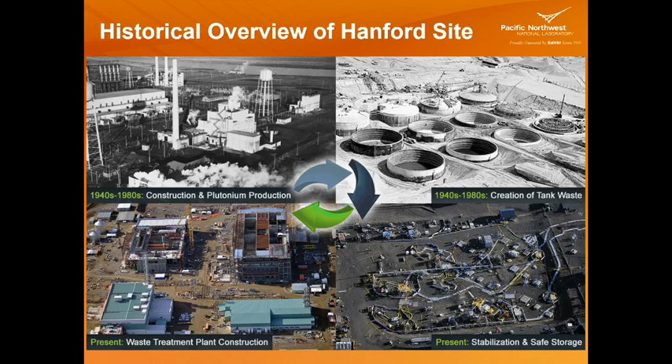The process started with uranium billets that were fabricated into nuclear fuel rods in the 300 area and transported via rail to the 100 area, where they were inserted into one of multiple process tubes in the 30-foot high reactor core. With water from the Columbia River rushing into the reactor, a nuclear chain reaction transformed uranium into plutonium.

It's hard for people to imagine the enormous energy that's produced in a reactor, but as I remember, the flow at that time was like 186,000 gallons a minute. And that water is entering the front face ice cold, and it's exiting the rear face at nearly boiling temperatures in that short distance of time. And there's 2,004 process tubes going through there, so it's hard to imagine the energy that is contained unless you hear.

So every time I mouse over this, it's going to act funny because I can't control it otherwise.

But talking about the energy, this nuclear reaction is producing a tremendous amount of energy. When they pull water out of the river at pretty cold conditions, I don't know if he thought it was ice cold. I don't think it was ice cold coming out of the river. But 50 degrees, it was pretty cold water. Running over that, it makes it boil. So there's an awful lot of energy being produced by this reactor.

We'll show you some more of the reactor as we go along, but this is what the nuclear reactor looked like back then. It's just a massive amount of energy that you experience. But a startup like that is phenomenal.

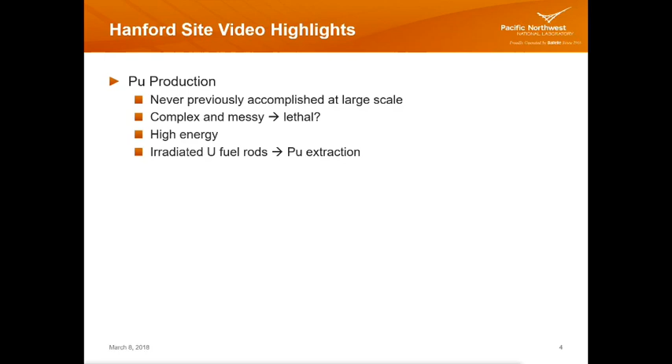Millions of gallons of highly radioactive liquid waste, a byproduct of this chemical separation process, were stored in roughly 60 underground tanks, ranging from 500,000 to 1 million gallons in capacity. Ultimately, the Manhattan Project was a success, and the long-kept secret was out. The plutonium produced at Hanford was used in the Fat Man bomb, dropped on Nagasaki on August 9, 1945, forcing Japan's surrender and bringing an end to the war.

Ushering in the atomic age, Hanford continued to support America's peace-through-strength policies throughout the Cold War, producing enough plutonium to maintain a continual and formidable deterrent for any potentially hostile nation, namely the Soviet Union. However, during these critical wartime and national security missions, the thought of what to do with the resulting waste and what its impact on the environment might be was secondary to the need for immediate production and use of the vital plutonium. Nearly 200 million gallons of this waste was held in underground storage tanks, or worse, returned directly to the ground.

There were two big headers on each side of the reactor, and the effluent was then distributed out to a cooling basin. 25 million cubic feet of buried or stored solid waste. 2,300 tons of spent nuclear fuel.

20 tons of plutonium-bearing materials, and 53 million gallons of waste in 177 underground storage tanks. This waste is the legacy of more than 5 decades of plutonium production, making it easy to see how Hanford became the largest, most complex environmental cleanup effort in the world.

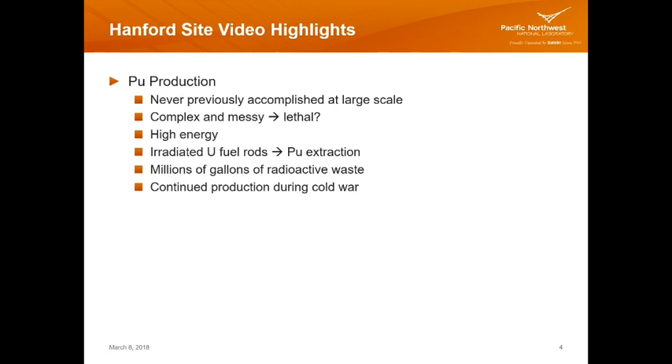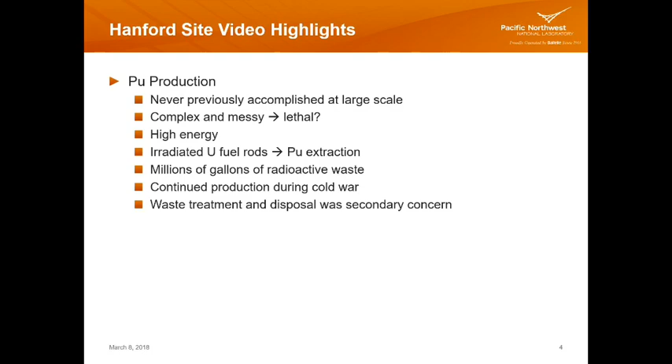So you can sort of see how the problem got to be so big with all that waste. So the video in the end was telling you how big the problem is. There's 149 tanks that were built, and since then we built a number more to store all the waste. Those were million-gallon waste tanks. All right. So again, the issue was not what are we going to do with the waste. The issue was making plutonium and trying to win the war.

Okay. So here's the Hanford site. It's 586 square miles in eastern Washington. That's half the size of Rhode Island. Okay, it's a big area that the government commandeered from the few people who were living there. About 1,000 people lived there in the first half of the 20th century.

And the government identified this as a primo spot because it had power. Grand Coulee Dam had been built in the 30s, not too far away, so lots of power. Largest river west of the Mississippi is here, so lots of water. Maybe, if you consider the Missouri River part of the Mississippi River system. And pretty remote, okay? So it was a very ideal place.

In the heyday of 1944, up to 55,000 people came to work there. Just signed up, heard there was work, and came from all over the country to work at Hanford to build. They didn't even know what they were working on. They just had a job. Whatever your trade was, you did your job. You didn't know what it was for. Nobody knew what it was for. Okay, they knew what they were doing in their little job, their little purpose. But they didn't know the big picture.

Couldn't tell anybody what we were doing. Yeah, we're trying to build a bomb to win the war. That was not the point. You know, it's not like the media we have today, where everything gets out left and right. Leaks are all over the place. Leaking was not approved then.

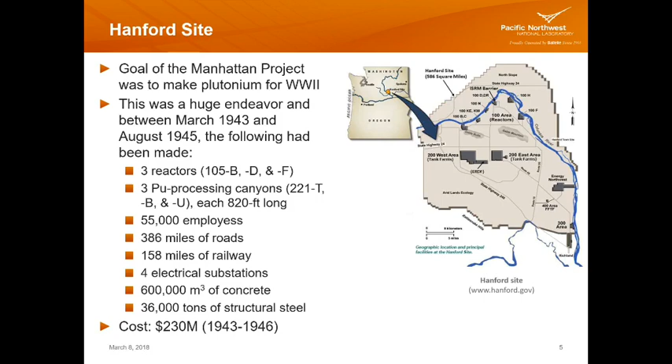So the ongoing process, as they said in the video, once we built the bombs, how many bombs were set off during World War II? 2. 3, 1 testing. I heard 2, dropped on Japan. How many bombs total went off? 3. The other one was Trinity, the one that was set off in New Mexico as a test right before that, just to see if we could do it. But we had 2 different kinds of bombs.

One was built at Oak Ridge, Tennessee. They were doing the same thing, only different. At Hanford, we're trying to get plutonium and using plutonium to build a nuclear bomb. At Oak Ridge, they were using uranium. They're building a uranium bomb, enriching the uranium. So we had 2 different bombs to try to make sure at least one of them would work, right?

We were able to test one of them. And that's all we had. But after we dropped the second one on Japan, they figured, well, it's going to happen again. Once it happened again, that's when they surrendered. We didn't have another one. That's all we had. So we were able to save a lot of lives by finishing the war.

So here's how bad it is, all right? So I said there's 149 single shell tanks. Those 1 million gallon tanks, 75 feet in diameter, 30 to 40 to 50 feet deep, storing this liquid waste. Well, over the years, again, we're not focused on long-term storage. We're just focused on the immediate situation. They weren't really designed to last very long, 15, 20 years, maybe. So what happens after it exceeds their design life? They still got this waste in it. What happens? They start leaking.

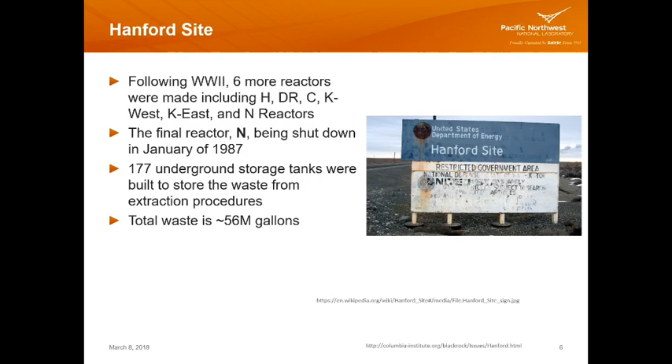So they built how many more? If there's 149 built originally, now we have 177. That's simple math, right? So 28 more tanks were built, but these were double shell tanks. These were meant to be long-term storage. And so they were able to pump a lot of that waste into there.

Okay, so how do you make plutonium? No, this is all free and clear stuff. Nobody needs to think that they're going to have to sacrifice their life for the knowledge that's coming out right now. All right, how do you make plutonium?

Well, you take some uranium-238, which is the common form of uranium you find, and bombard it with neutrons. Some neutrons impact the uranium and create uranium-239. Uranium-239 has a half-life of 23.5 minutes, so it doesn't last long. It lets off a beta particle and becomes neptunium. Neptunium has a half-life of about 2 days, and it decays to plutonium-239.

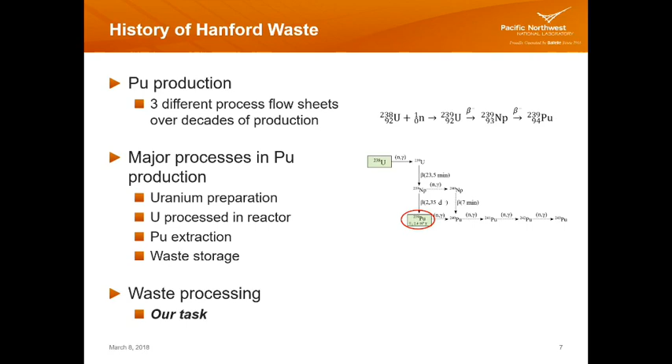So what they have is these fuel rods. These are tooled and shaped uranium rods, and that's what's inserted into the reactor. That's what's bombarded with neutrons, and that's what creates a lot of energy.

You've got to keep it cool with river water. The river water is not being contaminated—we're not putting contaminated radioactive water back in the river. It's just used to cool the plant.

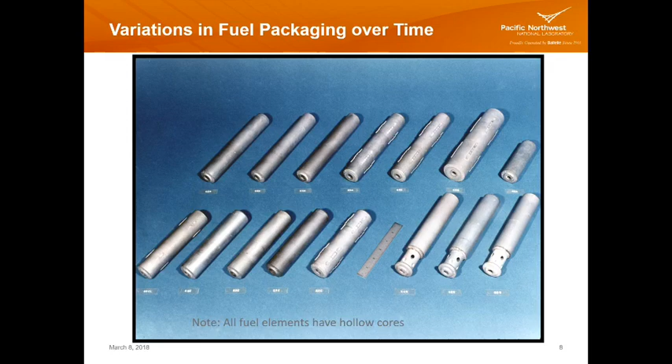Over the course of World War II, they ended up building 3 reactors. The B reactor was the main one where we got the plutonium used for the bombs. N reactor was the last one built, in January 1960, and was actually a dual-purpose reactor—still making weapons grade material but also generating power. All the other ones were just weapons reactors.

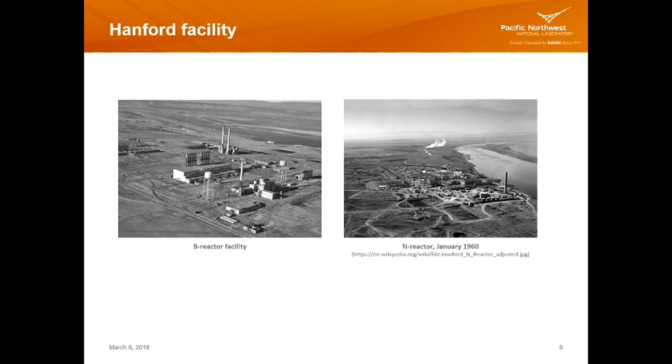They've all been decommissioned at this point, demolished and stabilized, except for B reactor, which is a National Historical Site. This is what it looks like now. You can still go out on tours and sign up for one. The National Park Service runs that with local people involved.

There are still people working here who were little kids at the time—some actually lived at Hanford and were displaced, told by the government, 'you've got about 30 days to take everything you want and get out, because we're taking your home and your land, and we're not telling you why. But just remember, we're fighting a war, okay?' So that has a part to do with it.

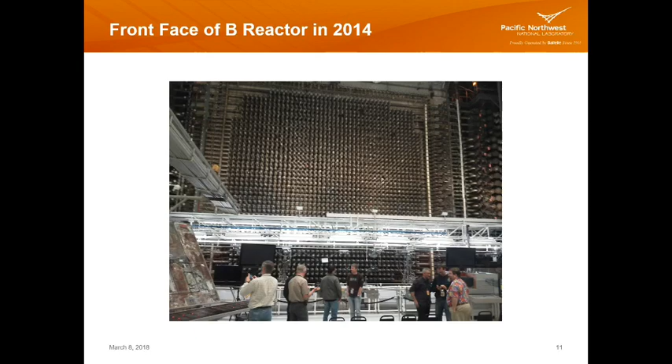So this is the B reactor, and here's the chemistry, okay? I'm not going to go into great detail on the chemistry, because I'm not a chemist—I'm a mechanical engineer, so I don't really like chemistry. But when you're working with this stuff, you work with people who like it and know how to do it.

So anyway, the plutonium extraction from uranium uses some pretty bad stuff to try to pull out the plutonium. As I said, it creates an awful lot of waste, both in the leftover uranium and in the byproducts that come out. In fact, it's not just chemical waste.

When you're trying to bombard the uranium to make the plutonium, there are a lot of other byproducts and decay products that come out of this. So it's a very complex mixture of chemical and hazardous nuclear waste. Cesium and strontium are the main byproducts of this process.

Cameron asked: is uranium hazardous as is? It's radioactive, so with enough handling of uranium you will be exposed to radioactivity. But I've got some—I showed you guys last time, I've got a little piece of uranium in my office. It's not at dangerous levels, but given the concentration, you don't want to be handling these without some tools. Isn't that alpha radiation?

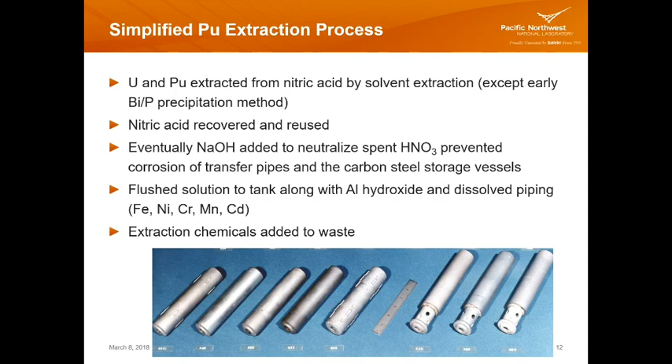Here's the slide I talked about, the B reactor that was built in 1944. A couple more were built during the war, D and F, to produce more. We didn't end up needing them in a timely fashion, but we kept producing this stuff because now World War II ends.

This is all recent history, all in the last 100 years. World War II ends, and now the Soviet Union is our enemy. They were on our side fighting the Nazis during World War II, and now they're on the other side, and they are developing these weapons too. They are building bombs and testing them. Now there's a threat that we would have a nuclear war, that these bombs would keep going off, that we would fight each other with nuclear weapons.

The impacts of what happened to Hiroshima and Nagasaki would become a routine thing in war. War is bad enough, people fighting and killing each other, dropping bombs, destroying facilities, but to be using nuclear weapons as a matter of course is worse.

When you hear about that today, you hear about the threat that North Korea has, that they have nuclear bombs that they would be willing to use on another country. Now we say that we're not going to go willy-nilly dropping nuclear weapons on something, but that was always the threat with the Soviet Union.

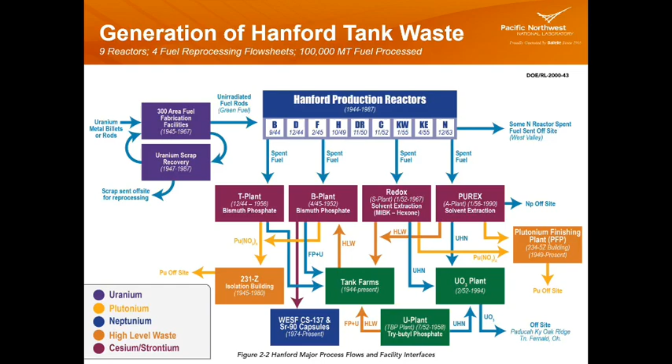In fact, since 1983, they've had a cleanup operation going for vitrification, which is what we're going to talk about in a minute here at Hanford. But they've been doing it for a long time. The Savannah River wastes are a compositional subset, just a small subset of the vast array of chemical witch's brew at Hanford. It's a small and relatively easy cleanup job at Savannah River, even though it's been going since the 80s. There's still a lot of stuff to clean up, but it's a fairly consistent waste stream to deal with, so it's not nearly as complex.

So this gives you an idea of the complexity of the problem, of the reprocessing that was done, of the variety of methods used to try to get the plutonium out. It created a lot of waste, and so in the late 80s, we start to realize we have a problem here.

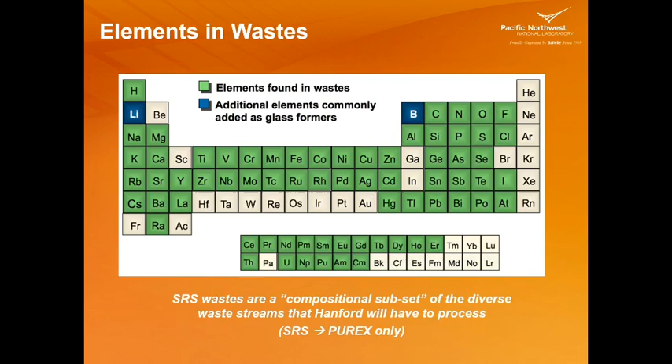Cameron asks: if the waste is all these different elements, wouldn't the waste react with itself? There's various kinds of reactions, and we'll look at some of those. I'm just still trying to get an idea of what exactly this waste is and why it is waste.

I've got some pictures of it. Here's a cartoon of an underground storage tank, like the tank farms you saw in the video before they got covered up. They built them in a big depression and covered them with soil, which gives some shielding. The thickness of the soil and your distance from it create shielding, because while plutonium is an alpha emitter, the stuff in these tanks includes beta, gamma, and neutron emitters, which are very dangerous to people. So you don't want to be too exposed.

In these tanks there are monitoring systems that come up from underground, but the composition inside is quite variable because there are various components. There's a liquid portion at the top, sludges at the bottom, and a lot of salts. The chemistry and nature of the materials causes precipitation into salts, which become very hard and difficult to deal with. You can't pump the salts - it's not a slurry so much as a hardened salt cake.

When they started leaking and realized it, the monitoring equipment could tell that the fluid level in the tanks had changed over time, indicating some of it had gone somewhere - it had drained out. There wasn't a lot of monitoring put in underground to know where it went, so you have to drill holes to try to pick up some of that material in the ground.

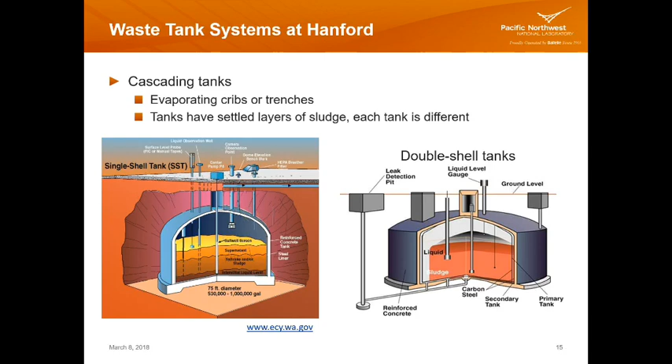We won the Cold War in 1989, and that's when they realized we need to focus on cleanup now. No more production - they stopped all production and closed the reactors. The N-reactor was actually operating through the late 80s, producing both weapons-grade material and power. It was shut down for normal outages - you have to do that periodically to change out fuel and do maintenance - so in 1987 it was shut down for normal routine maintenance.

That was right after Chernobyl. Chernobyl was one of those events where in your life you remember where you were when it happened. I had just started a job, just graduated from UC Berkeley with my master's in mechanical engineering. I'd gone to work at a facility in Dallas where we were designing some stuff, and there was a Russian guy working at that company, and we heard about the Chernobyl accident.

They had mismanaged their reactor - they have a different reactor design altogether than we do. They mismanaged it and it was a huge, huge disaster. It blew up, contaminated the countryside, and killed a number of people. It was the worst environmental disaster, at least to that date. Some people would claim Fukushima is a bigger disaster today, but don't tell that to the people in Ukraine who live near Chernobyl - it's a ghost town right now.

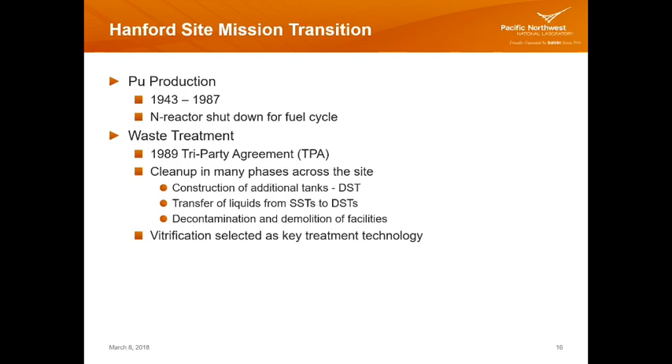So vitrification, and we all know that is making glass, right? Vitrification is to turn something into glass. That's the technology of choice, okay? So let me tell you about how that's going.

So at the Hanford site, I worked for, and still do, part-time, the Pacific Northwest National Laboratory. They are one member of the team of companies that work at the Hanford site, the longest-standing member there, but the newest member is Bechtel National. Bechtel is a big construction company that builds stuff all over the world, buildings, bridges, nuclear power plants, and they're in charge of building the waste treatment plant at Hanford, the VIT plant. I'm going to show you a little bit about what's involved with that.

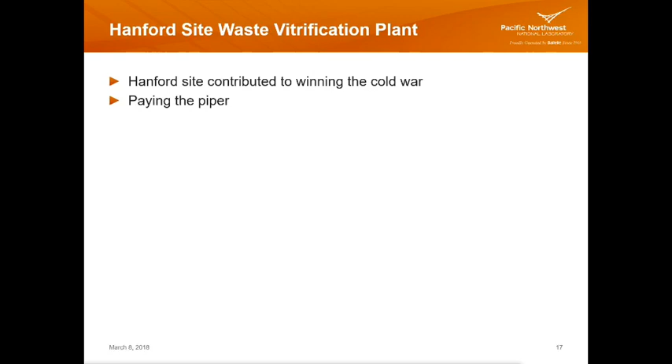The Waste Treatment and Immobilization Plant, or WTP plant, will use a process called vitrification to immobilize the waste in solid glass for safe, long-term storage. Vitrification is a proven technology used in the United States and Europe, but never on the scale and complexity of waste found at Hanford. The completed WTP plant will include a pre-treatment facility for separating the tank waste into low-activity and high-level waste streams, two vitrification facilities, one each for the high-level waste and low-activity waste streams, an analytical laboratory, and approximately 20 support facilities to provide cooling water, electricity, and other utility requirements.

In the low-activity waste facility, waste will be mixed with glass-forming materials and heated to 2100 degrees Fahrenheit in 2 300-ton melters, poured into stainless steel containers, cooled, and prepared for storage. The facility will produce 30 metric tons of immobilized glass per day. In glass form, the waste will be stable and impervious to the environment, allowing its radioactivity to safely decay over thousands of years.

The low-activity waste facility is the key component of the department's focus on direct feed low-activity waste, a process which allows for the treatment of low-activity waste in advance of completion of the entire WTP. During DFLAW operations, approximately 1 million gallons of double-shell tank waste will be delivered to the LAW facility for treatment.

So LAW is low-activity waste. It's a portion of the waste that gets separated out into high-activity waste, or high-level waste, and low-activity waste. That's also more of a political term that I don't want to spend any time on, but there are two different types of radioactivity that are going into those places.

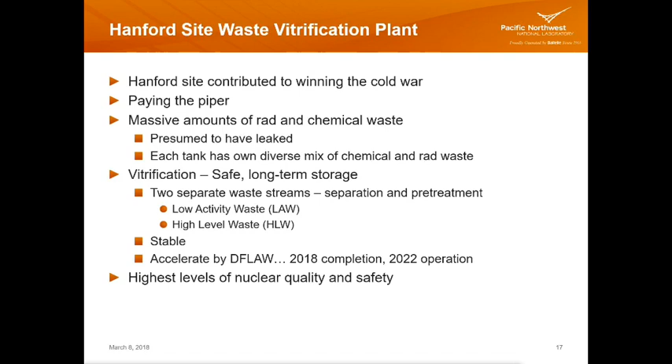So highest levels, nuclear quality and safety. You don't get much exposure to quality assurance. I think we're talking about trying to put a module of that into IEP2, say, to give you some exposure to quality. But you'll get a lot of that in your work. When you're out in industry, there'll be attention to quality in various aspects. Quality and safety tend to be very, very important at places like this.

They tend to be, perhaps in the view of some, overemphasized, because at some point when you're trying to be as safe as possible, and this is all just my opinion, it's not anything official, you don't get any work done because you're constantly in safety reviews. You're constantly trying to make sure it's as safe as possible, so you can't get any work done. I have a little saying I'll share with you: when safety is job one, no other work gets done.

So it's important to have safe and secure operations, but as engineers and scientists, we'd like to think that we can do it safely and still manage our risks. But sometimes the people in charge say it's not worth losing one life over doing this. So if you start saying, well, maybe 2 or 3 people might die out of 3,000 that are working here, and that's acceptable. Well, it's not acceptable to those 2 or 3 and their families, right? So you need to manage that somehow and make sure that you are working safely but still getting your work done.

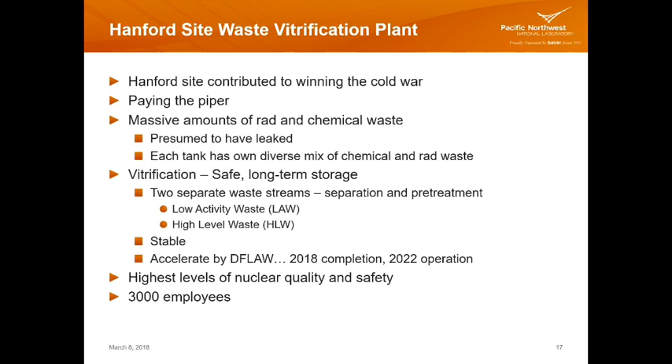We talked about the plant pretreatment. It's very, very challenging. I wanted to show you one more little video here of actual melting. So this is a test that I was involved in. Our lab is probably about as big as the front of the stage. We've got a melter that's only about this big, and we're simulating that big process, simulating what's going on in these facilities with these big melters.

And so what you have here is a pool that's about as big as a coffee can, a 10 can, where our melt is going. So this is inside of that circle. There's a couple of plates here. This is joule heating. So you're sending energy to these two plates, these electrodes, to heat up the glass. Look here, that's glass. It looks just like lava, like a volcano. And we've got it contained in a little pool.

And then there's a nozzle that comes down here and drips the waste feed. We're using simulated waste in our process, that's all the known chemical compositions, but not the radioactivity. And so we're just turning that into, you can see it bubbling up and cooling and sitting on top of the surface. We'd like to get a lot of it on the surface, because that will help keep it cooler at the top and help incorporate the stuff better into the bottom. So it's pretty cool to be involved in some of that research.